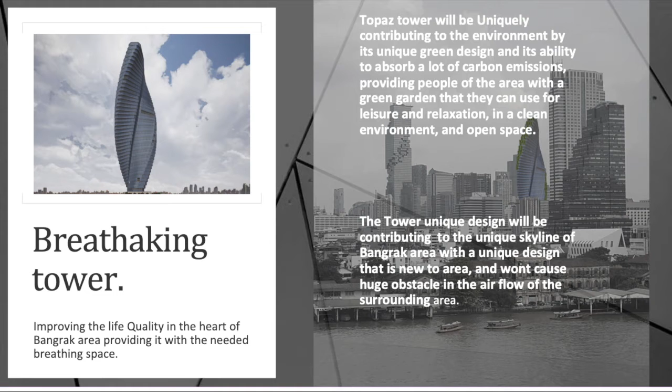Why choose spiral? First of all, spiral is one of the main and most famous ways nature uses to overcome strong wind. So that's one of the first things, to try to withstand wind effect by mimicking nature and the way that plants grow. Spirals also most of the time follow the Fibonacci ratio, which is called the beauty ratio. And third, spiral buildings allow vegetation in the gaps between different floors at different angles from one level to another.

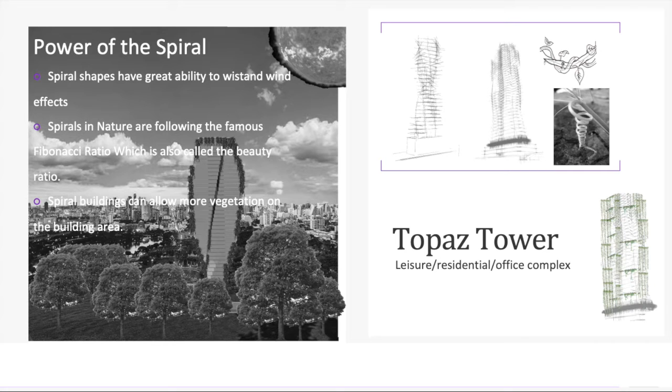The site is very accessible. It is lying on Charoen Krung Road. It can be accessed by BTS, by boat, and by bus because it's next to Surasak BTS. Walking is going to be around 15 minutes, or 5 minutes if you use an Uber or an Uber motorcycle.

From the pier, it's 5 minutes walking or 2 minutes with an Uber. From the MRT, it's around 20 minutes walking. Public bus stops exactly on Charoen Krung Road, right in front of the site, so it'll take a minute if you took the bus.

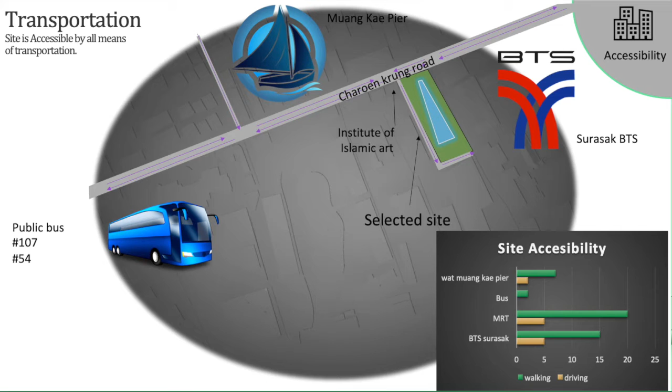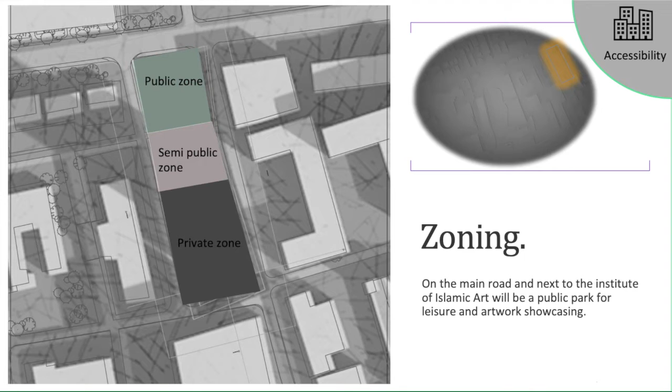Speaking about zoning, I've decided to put the private zone at the back because it's the quietest zone, the semi-public zone in the center to be the area where you can have people from outside but not really public, and then the public zone will be the park that lies on the main street for public use and because of the noise on the main street.

Then we have a problem in Bangkok: Bangkok has 3.3 trees per person, which in Thailand is very low, and among all the Asian capitals it's one of the lowest, even lower than the international standard.

If we try to calculate the green area in the surrounding 238,000 square meters, we find there's only 3.03% green area, which lies in the Portuguese embassy, so it's private use. But in the same space, if we add our garden and vertical greenery if possible, the green area is going to jump to almost 12%.

So we will be able to add 9% of greenery, 27,000 square meters, which is very much needed in the area, and it will cause a great environmental balance.

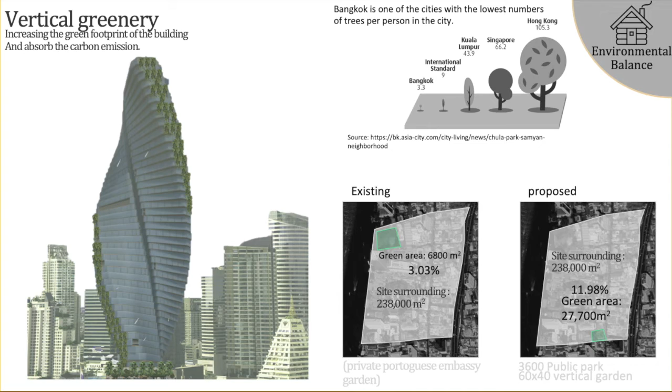For the design criteria, we will have two types of users: residential and office use. In order to create the balance we spoke about, we will have an environmental balance and a structural balance, and we will have to put our context into consideration.

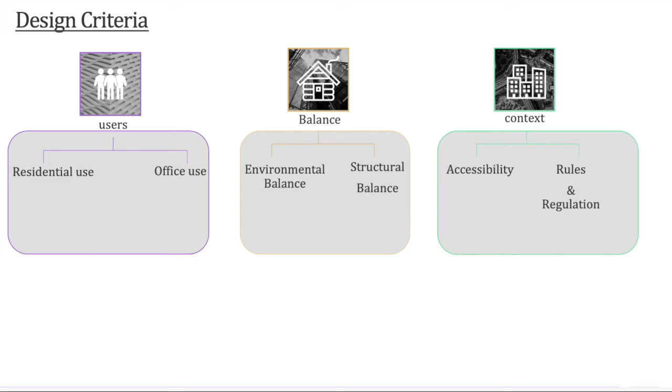When we think about how the site is going to be laid out and how the building is going to be used, we will have a central core. Half of the building is going to be used for offices, another half for residential, and on the top floor we will have a double ceiling floor to be used for a restaurant, a swimming pool, and a gym.

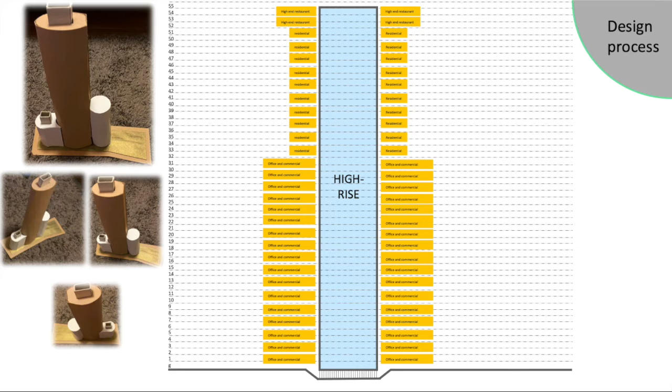The idea for this form came from a book I was reading, where I found something called an energy key, which states that any linear flow of energy in that kind of shape produces four different qualities to its surroundings. This basically means we will try to add positive energy around the building for whoever looks at it or uses it, which is proven to be a source of positive energy used in the time of ancient Egyptians.

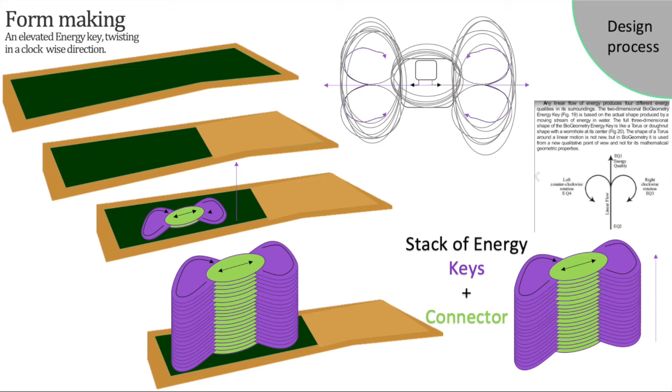We started by creating our core. So in order to obey the rule, we created a core, and we put the fireman lift.

Then I decided to combine one stairs for two different uses. The stairs you can see is a 1.5 width stair, and it's going to be used for the fireman emergency exit and also as the main stairs for the building.

Then we have two toilets and four elevators, and the 3 meter width of the elevator corridor is basically 1.7 times 1.7, because there are two elevators face to face. The rule says 1.7 times the inner cabin width.

Then we decided to make a clockwise rotation of those masses, which we call stacking and twisting.

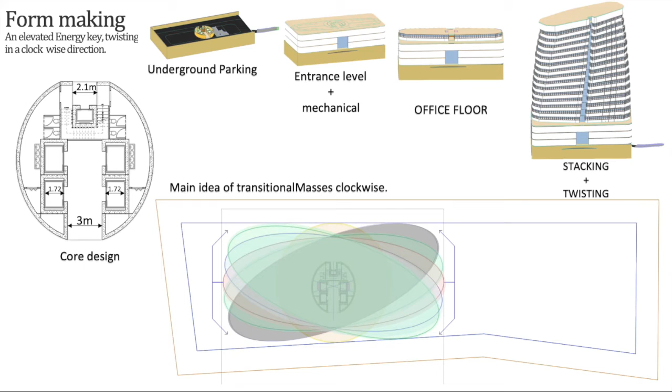So basically we'll have an underground parking, an entrance level with a mechanical floor right over the entrance level, or services floor to be more accurate. Then we have office floors, and over the office floors is going to have the residential on top of the building. Speaking about residential, we have three different types of room: standard, deluxe, and duplex.

For different kinds of residents, definitely. Moving to the offices, we will have two different types of offices, for two different types of companies.

Tier 2 companies are the kind that have from 20 to 40 employees, and those people are going to use either one office or merge two offices together. Tier 3 is from 40 to 100 employees, and those are going to take a whole floor.

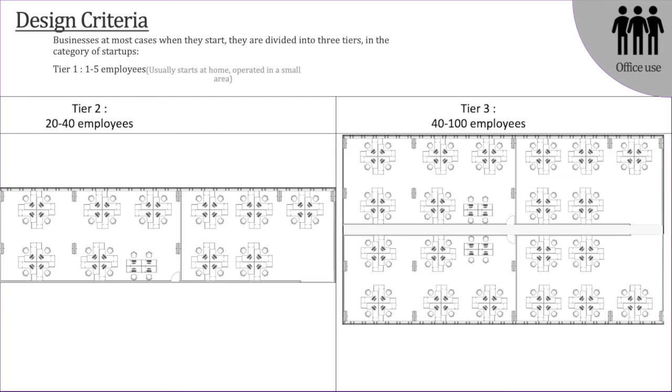Then, why twisting? What is the use of twisting? Of course, the first thing is to create a structural balance. How can we do that?

A regular building is usually going to have a maximum lateral load, and the more we move to the top of the building, the stronger the lateral load caused by wind is going to be. But having a twisting design decreases the lateral load.

How did that happen? By creating a path for the wind. Instead of maximizing the lateral load, the wind is going to flow through the building.

Plus, we have the shift in the angle all over the twist, which is usually used for even the condenser for the air conditioner and green plantation. You can also use the green plantation to be watered by the air conditioner condenser water.

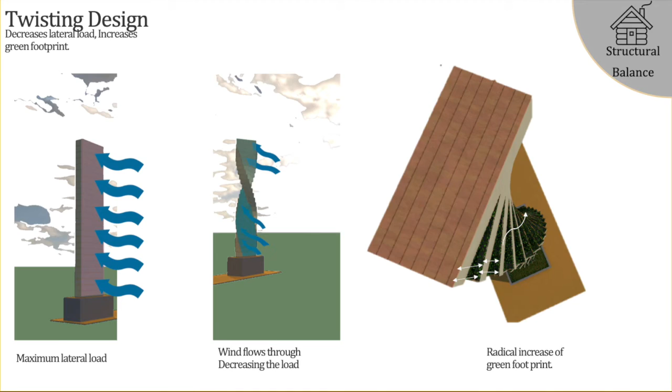Then looking at the GIF in order to understand the structure development. So we have used a concrete core surrounded by steel beams, a Vierendeel truss made out of steel, and we duplicated every 2 floors. So it's not going every 1 floor, but every 2 floors.

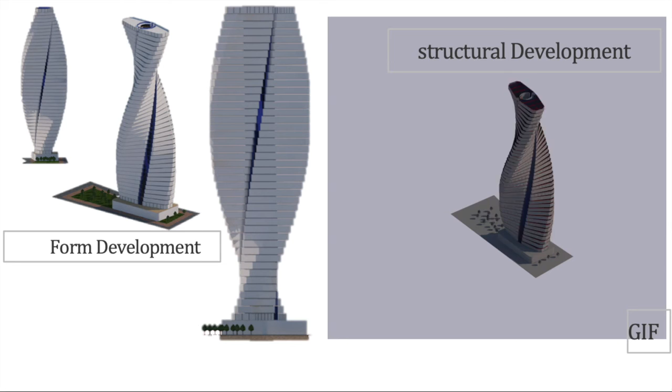So 1 floor is supporting the one on top of it, and it goes like that till we reach the last floor. The first two floors are concrete, and of course the underground is using concrete as well.

Looking at the facade and the structure, the facade is using double tinted glass, a laminated kind of glass that doesn't really allow a lot of sunlight inside, so it's not going to be super hot. We are using a steel frame, which makes the building feel more floating, lighter, and more modern. Plus, it's much better looking for the skyline of Bangkok city.

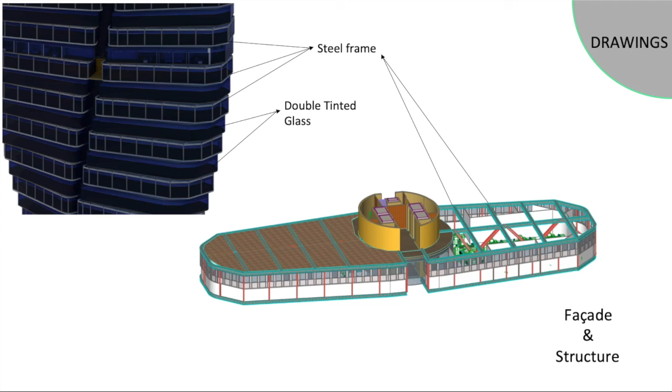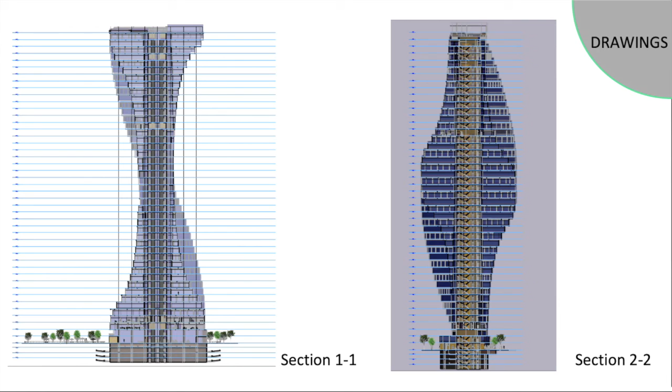And then looking at our sections, we have the core in the center, and this is the twist that you can see in those two sections, very visible. We have on the left side our greenery, and that's another axonometric section in order to understand how the stairs are going up and how the building looks in section, how the twisting is going to act with the core.

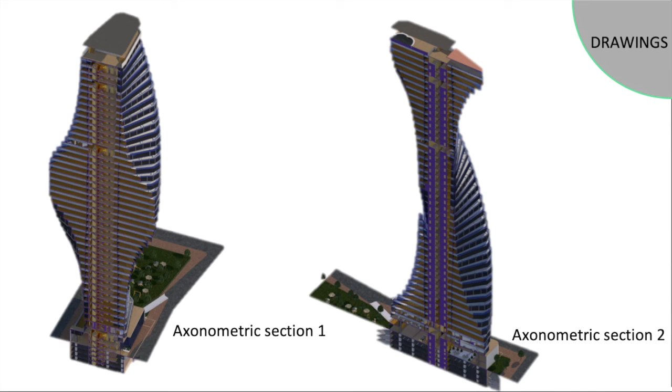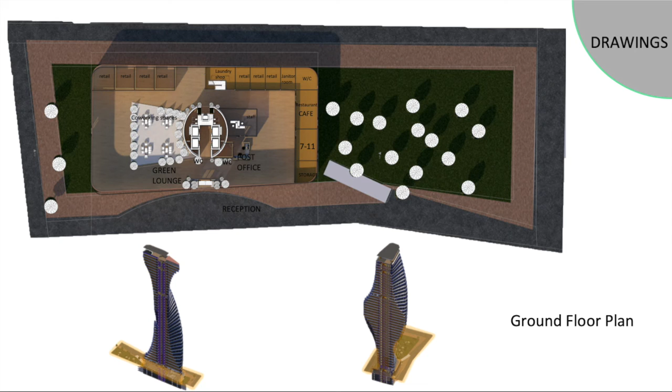Then moving to the ground floor plan. We have the public park on the right side, the entrance for the parking. We have a 7-Eleven, cafe, and a restaurant to serve the public. Then we have inside some co-working spaces, retail, laundry shop. We have the staff room, a post office to collect the parcels, and the reception.

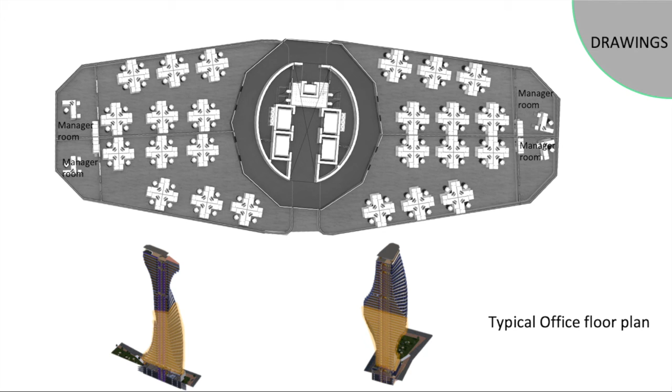Then we have the typical office floor plan, so that the tier 1 office, and if it's tier 2 it's going to be a whole floor instead of one building. As you can see, it's surrounded around the core.

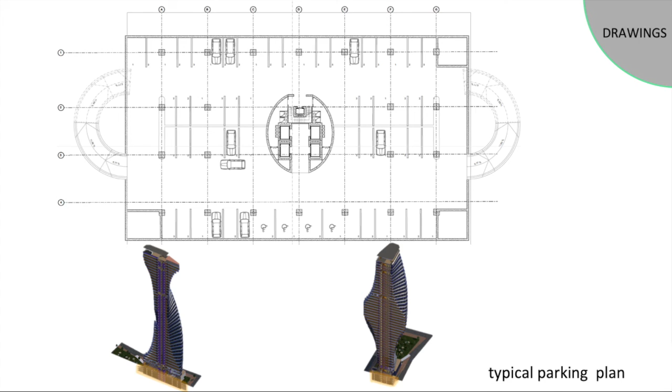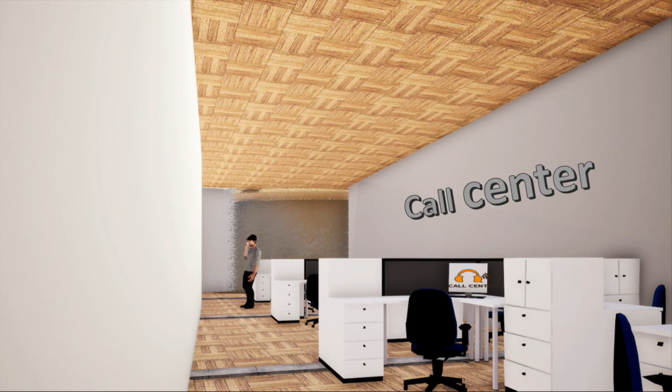And then we have some pictures, snap pictures taken for the renders, as well as the renders that you can see in the video as well.